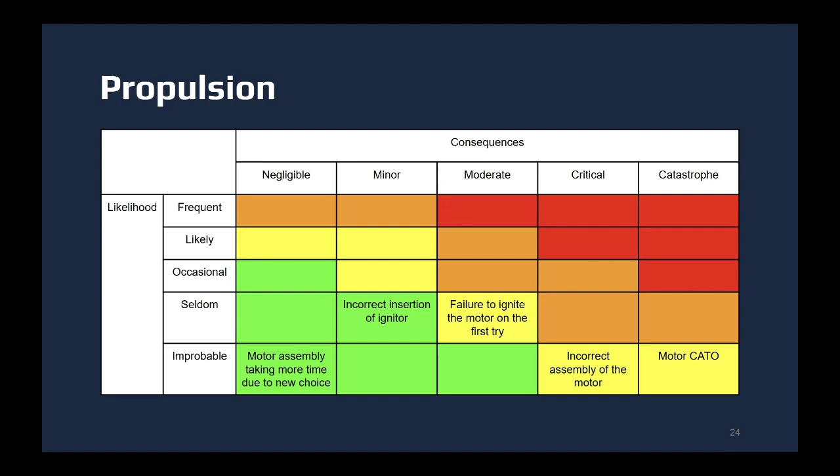And that's us, so that's propulsion.

I'm Matthew, the structures lead for Space City Rocketry. Moving forward in terms of the structures, the goals we have - there was a lot of change in terms of the scope of the project. We're working at a different scale. It's going to be a smaller rocket, still 4-inch diameter, but we're working in a different scope now.

So in terms of the goals we had, it was a lot of refurbishing and also integrating some components we're reusing into the new airframe. For example, for the recovery, we're going to be replacing the U-bolt, and then we need to prep the new U-bolt so it needs to be threaded all the way up. Drilling holes in the airframe, prepping that to integrate with everything else.

Screw calculations we've already done - the most important screw calculations on certain items that are going to experience the most load - but that needs to be furthered for every single component that we're going to be doing, to reassure ourselves that that's going to be integrated correctly and all work out. Refurbishing couplers and nose cone - there's a couple things that need to be done with that, but that shouldn't take too much issue. That'll probably be some of the things we'll do first.

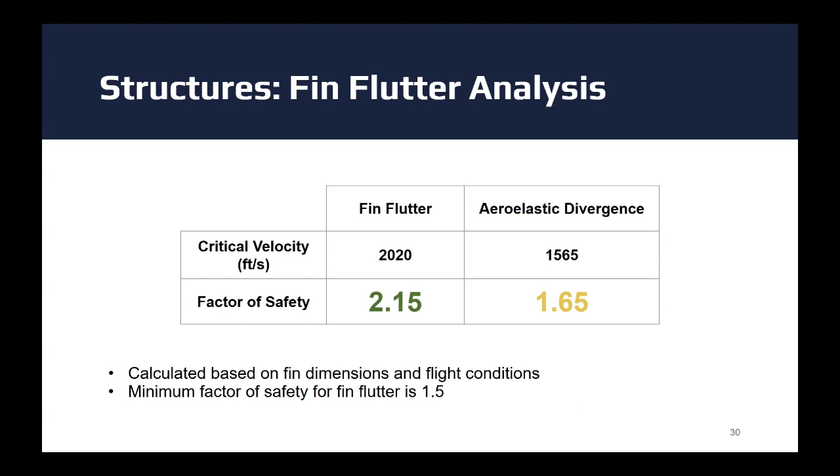As for the reuse of components, it definitely drives down the cost of repurchasing components while allowing us to focus on what needs to be done, essentially the manufacturing of the things that are going to change. I guess it's: what's not broken, don't fix it.

Especially with our change of timeline and accelerated schedule, we want to focus on doing the things that we're going to do right, which is refurbishing and manufacturing new components this semester. So in terms of the nose cone, there's no visible delamination or fragmentation of the fiberglass composite structure.

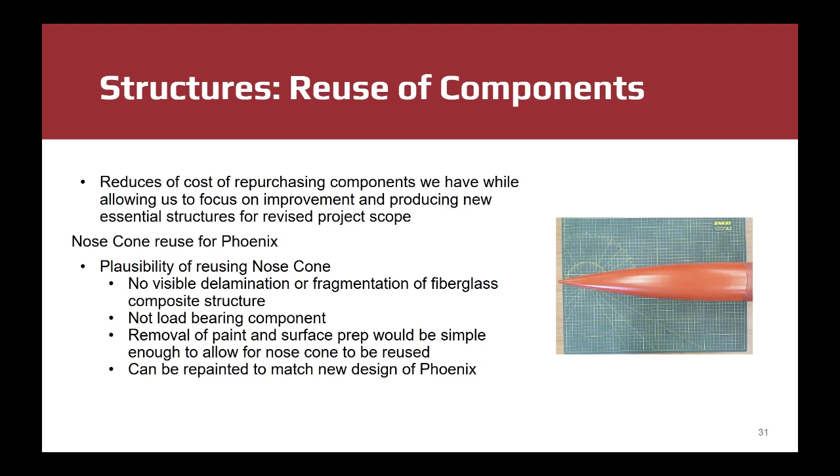Whenever researching the viability of fiberglass composite components, a lot of the methods were just visual inspection - checking for delamination, fragmenting, cracking, or anything of the composite structure itself. That's what we looked at, as well as the fact that the nose cone doesn't take too much load besides making it more aerodynamic. For refurbishing, we'll be resurfacing and repainting it to prepare it for the new rocket.

As for the couplers and bulkheads, we visually inspected the bulkheads. There is one of the bulkheads for the lower avionics that we are going to be remanufacturing because not all the holes line up properly - just an error of manufacturing in general. So we'll be remaking that to accommodate for the coupler itself.

The axis of the screws that the forces are going to be placed upon doesn't actually affect that area it's at. We will need to reattach the rails to the coupler itself, but that's as simple as re-epoxying and lining them up properly.

In terms of the screw calculations, the main ones we've done so far are the payload bay and the motor retainer, because those are the heaviest components, and during the snatch force and in case of impact under drogue, those will be experiencing the highest forces on their actual screws.

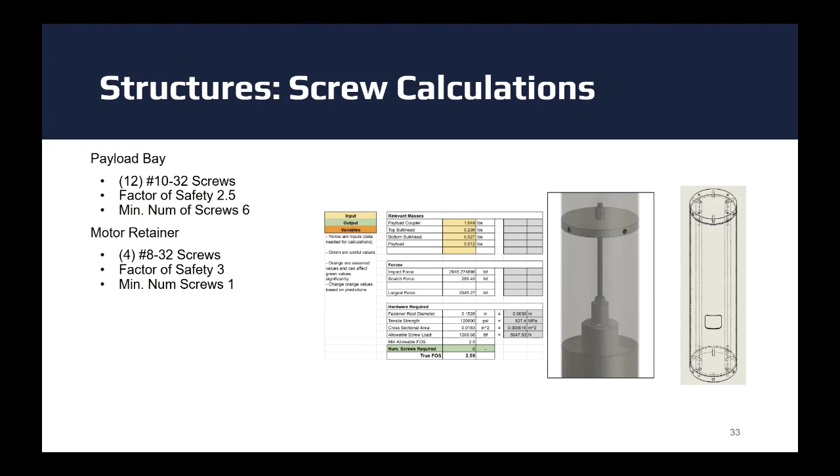In terms of the motor retainer, the minimum screws was one, but obviously we can't just put one screw. So with it being four screws, we're well within the factor of safety for that structure as well.

In terms of risk, it's a lot of the same that we discussed previously. Obviously we are doing it at a different scope, so we don't have the worry of the larger motor and the higher impulse. So it's actually a lot safer in terms of the structure of the rocket.

In terms of fin flutter, it's minimal. We did all the calculations with the new fin structure and everything like that, and we determined that it's all safe and sound by the analysis.

In terms of motor retention, we improved upon the retention method a lot. We thought about it a lot, and with the effective torquing and the locking washers, we don't anticipate any issue with the nuts themselves walking off.

In terms of fastener failure, that was another thing we also looked at. Going back to the actual screw analysis, that's where we made sure the fasteners themselves were up to spec in terms of the forces being experienced by the structure, and we were well within our safety factor on that as well.

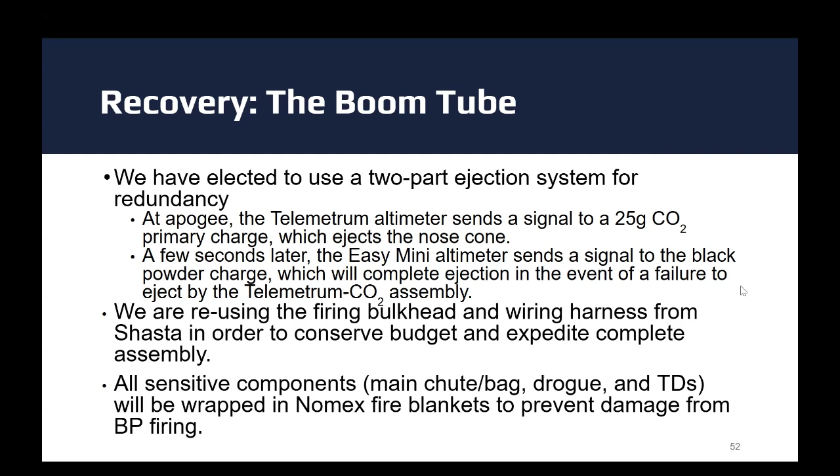So right now, we've chosen to purchase new parachutes for the Phoenix. This is mainly due to Shasta's drogue and main not being suitable for our new recovery bay, which, like John mentioned, reduced in size. Also, Shasta's drogue and main would slow down our descent rate too much because our rocket decreased in size and weight.

So we base our required descent rates from the given descent rates from IREC, and we use RockSim as our intended descent rate calculator, but we also cross-reference with other calculators, which I'll mention in our upcoming slides. We calculate different descent rates for our different parachutes, diameters, and drag coefficients.

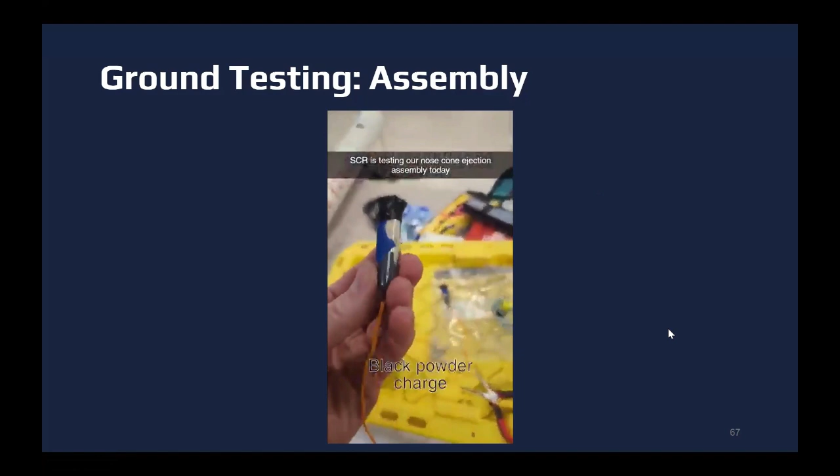This here is a black powder charge packed into a tube with some wadding. This is the smaller Raptor assembly. And then, as you can see here, is the full assembly with the full-sized Raptor and the black powder detonation tube.

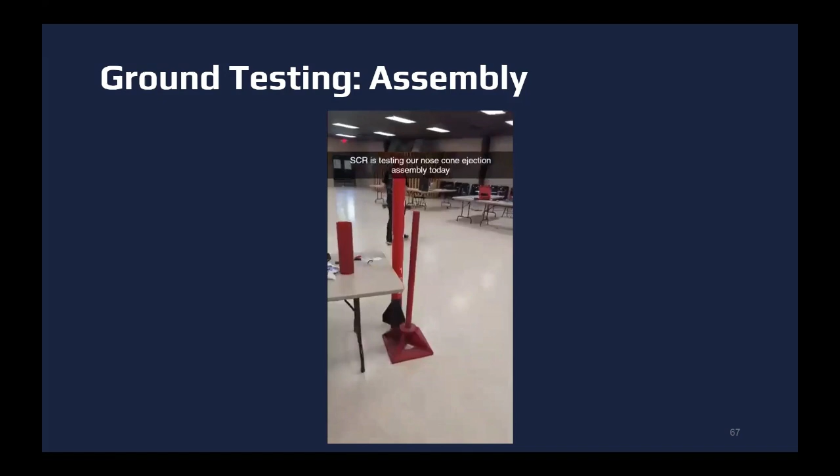Here's a video of the actual black powder system. Or sorry, this is CO2?

We had a couple of failures early on, so I was very excited it worked. So yeah, sorry, I mixed up my headlines. That was CO2, this is black powder.

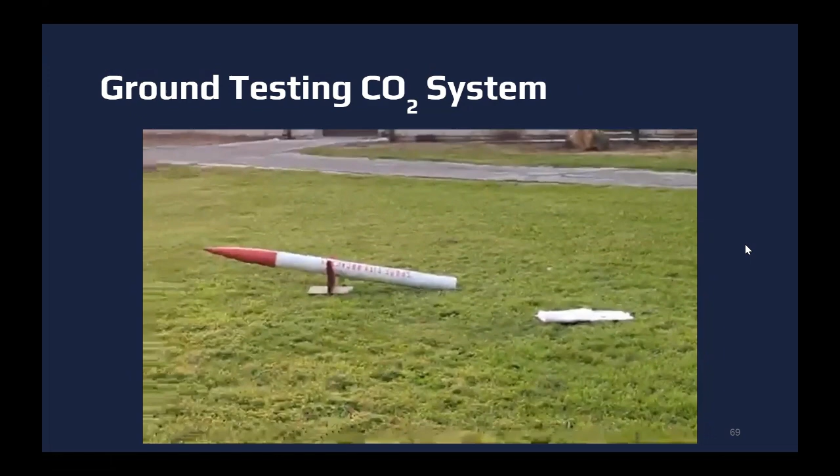A little overtuned. However, because we did secure the nose cone with the Kevlar retention strap and made sure that we were in a nice open field, nothing was damaged - we didn't shoot the nose cone into the side of somebody's house or anything like that. So everything went as expected.

We have also conducted some battery drain tests. So on March 19th, we completed a set of battery drain tests using 4 lithium polymer batteries rated at 3.7 volts. These were the old batteries, not like the new batteries they just got.

So by setting our initial value to our max voltage battery, so here it was just the Y-intercept, we set that to an ideal 4.2 volts, assuming the batteries were fully charged, and then we calculated essentially how long it would take for each one to reach a minimum voltage of around 3.2 volts.

This is not ideal - ideally it would be 3 volts, but again, we can't always have what we want. It's 3.2 because putting it down to 3 would just be ludicrous.

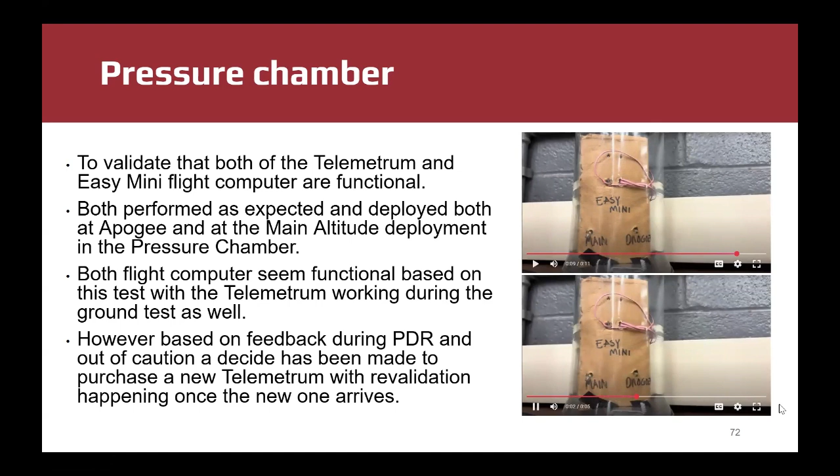To show you kind of the Easy Mini deployments - so the drogue goes off, and this one should be the main. So, and then don't do that.

There we go. So Jake said we tested both COTS flight computers in the pressure chamber, and here you can kind of see the live data we recorded off it. Basically it graphs the height, simulated height, the speed, acceleration over time.

Yeah, there's not much else to add about that. Thank you.

Hi, so for payload, our goals are to design an experiment to study the effects of low hypergravity on sea urchin sperm, and also to have a structure that's capable of withstanding requirements such as temperature for the experiment.

Some of the major updates we have is our target temperature. Rather than trying to keep the samples at -80 degrees Celsius, we've shifted it to 4 degrees Celsius, which has been very helpful. We've also finalized our sample acquisition, and we have contacted IACUC, the ethics board for animal use, and they said we don't need any certifications for sea urchin testing because they're invertebrates.

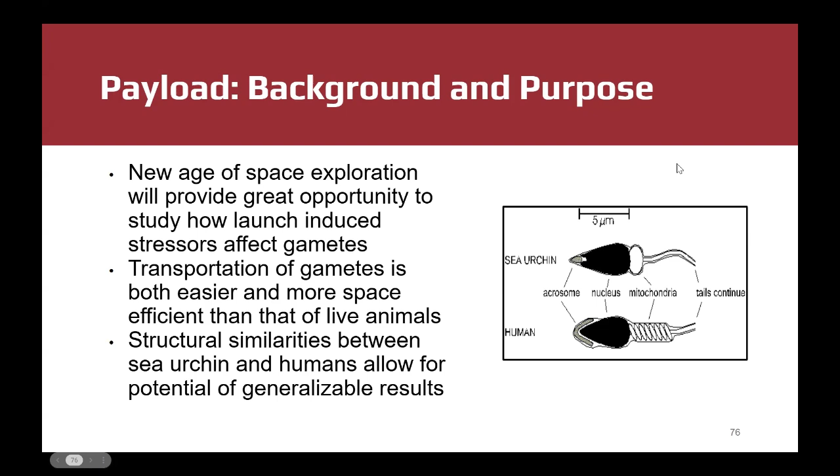A little bit of recap on the background. Since we are moving into a new age of space exploration, we thought it was important to study the effects of stressors surrounding launch on gametes, so we've chosen this avenue of biomedical research aboard the rocket. In the future, they'll most likely use gametes as it'd be more efficient than live animals. We've chosen sea urchin sperm because of the similarities it has to human reproduction, given that they're used as development models for humans.

Our hypothesis for this experiment is that as a result of the low hypergravity associated with launch, we will see an overall decrease in sperm health. This could be through the 3 metrics of sperm health we mentioned at the PDR: a decreased overall count of sperm, more clumping of the sperm, or morphological changes. Also, since we are no longer cryopreserving the sperm, there might be more damage as it would be a fresh sample.

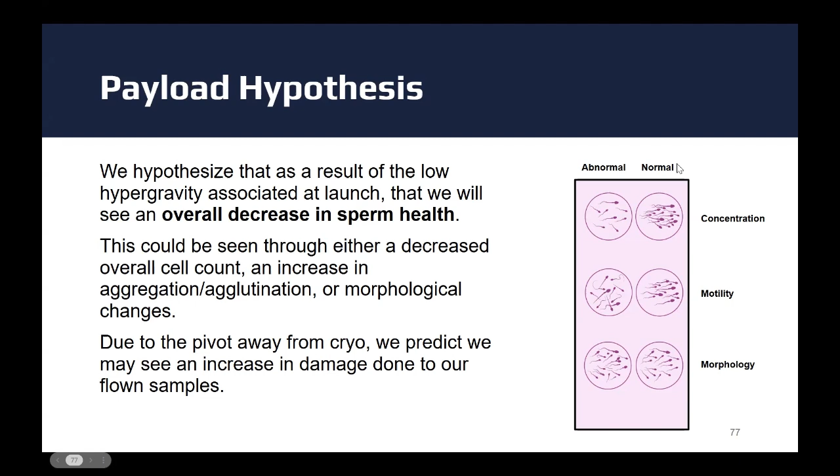So we still plan to use sea urchins. The next slide is our decision matrix regarding that. Looking at the upkeep, accessibility, viability, and ethical concerns, we found that sea urchins would be the best model organism.

We're either going to be using pencil urchin or green sea urchin. We're leaning more towards green sea urchin right now, as that's the one available in the embryology kit we were looking into. The kit we finalized has the urchins and everything we need for sperm extraction and sea urchin survival. Due to us not finding any labs willing to donate sea urchins, we found a kit that has everything we need.

This is the updated protocol. We no longer have the cryo and thawing protocol because we won't be doing that. Our protocol for analyzing sperm health before and after launch is the same, and that's in the appendix. An update to the protocol is how we're harvesting the gametes from the sea urchin.

We will be injecting some potassium chloride into the urchins. We're approximating 14 sea urchins, 7 of which will be male. We're trying to look into requesting more males, of which they're saying 50% would be fertile, so we're expecting 3 or 4 fertile male sea urchins. 1 sea urchin is all we need per trial, and it will produce around 3 to 4 milliliters of sperm.

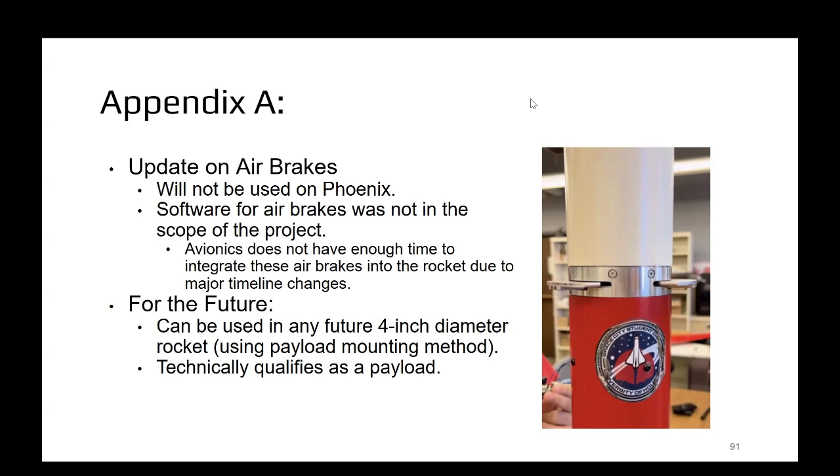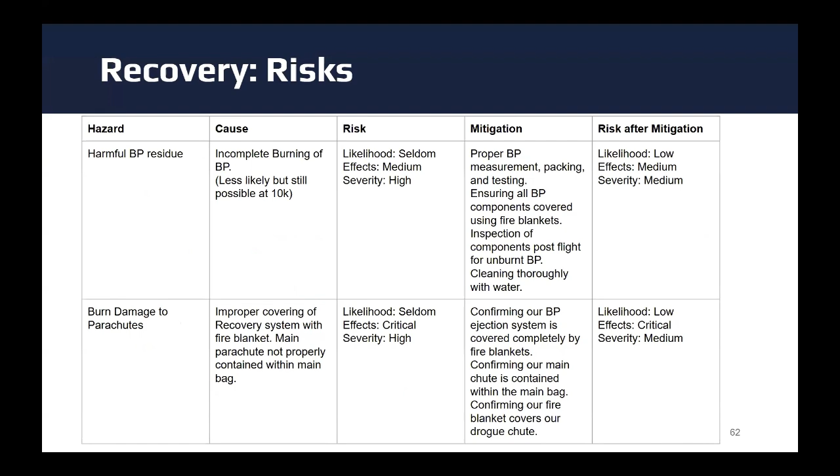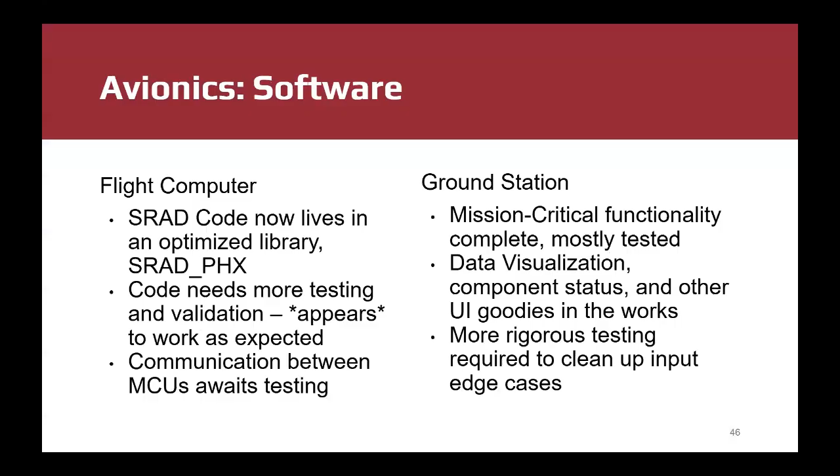The reason we have a minimum and an ideal is basically what you're saying. The minimum of what we consider mission critical would be first the chief engineer and project manager, because a lot of the protocols require the lead and alternate lead of the team to be there. In addition, we would need at least one recovery sub-team lead, at least one avionics lead that is ham certified, and we would also need our structures lead there. For the payload to function as designed and for them to do the testing in place, they need 2 people. So the payload team would make the total 7 - that is our absolute minimum requirement.

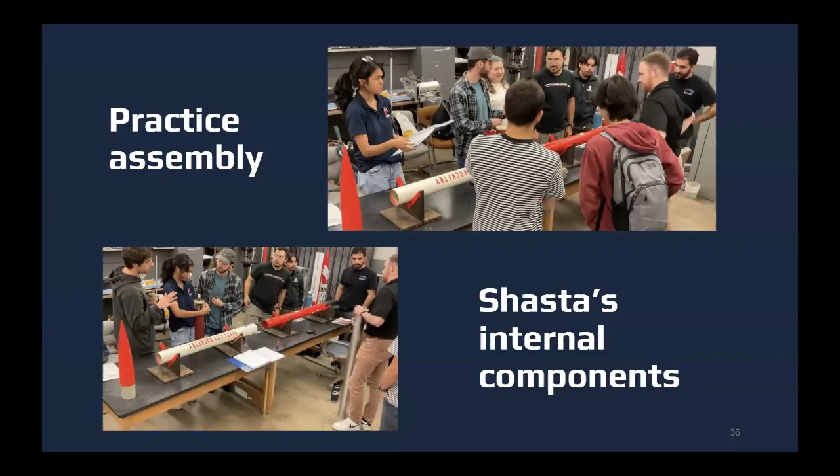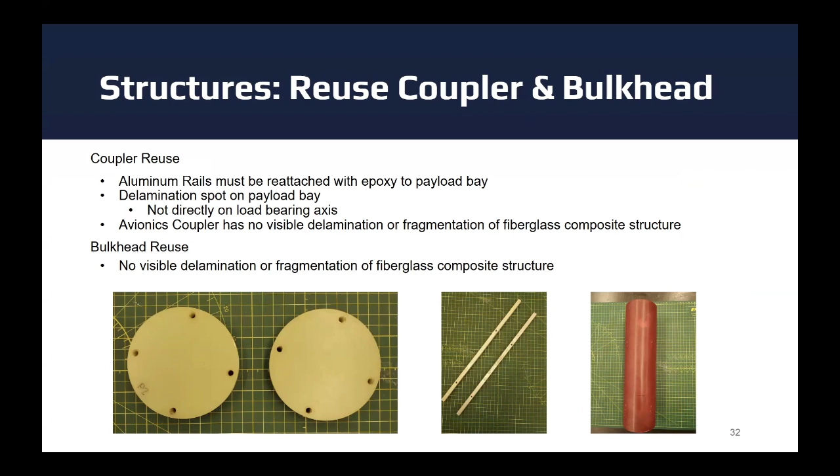It would mean that we don't have a propulsion lead there. However, Chief Engineer Alfredo was previously the propulsion lead, so it would mostly be on him to deal with that, and Matthew as well, our structures lead, to deal with motor retention. Obviously 7 people is still very tight - it's pretty much the entire recovery team. The recovery team is about 5 people, the people that can actually go and physically get the rocket back.

So that minimum for the logistics would mean 7 people go, and also the reason the Rocketeer fees is 0 is because it would mean we are paying for our own Rocketeer fees, which is $75 per person. In the ideal case, we would not have to pay our own Rocketeer fees, and that would include 15 people. So we do currently have 15 leads in the team, not all of whom would go, mostly because of availability.

But we would also like to include at least 3 non-SCL members, more so new members, maybe sophomores who are going to have a better chance at carrying the team for next year and will have competition experience that's really beneficial to the team. Because right now, the only person on the current team who has been to competition is Matthew, our structures lead, and that's been a bit of a limitation. So we would - oh, I'm sorry. Yes.

Okay, we do have 2 people. I'm sorry about that. Yes.

So we have 2 people on the team really that have been to competition, although Matthew did not even go with UH, so let's say one. We would definitely want to set the team up for success for future generations by sending people that are not just mission critical, but so that they can have the experience and carry the team as well. So that is on the higher end, that would be 15 people. That's all the changes in the cost for housing, transportation, food, and the Rocketeer fees. That's where those come from.

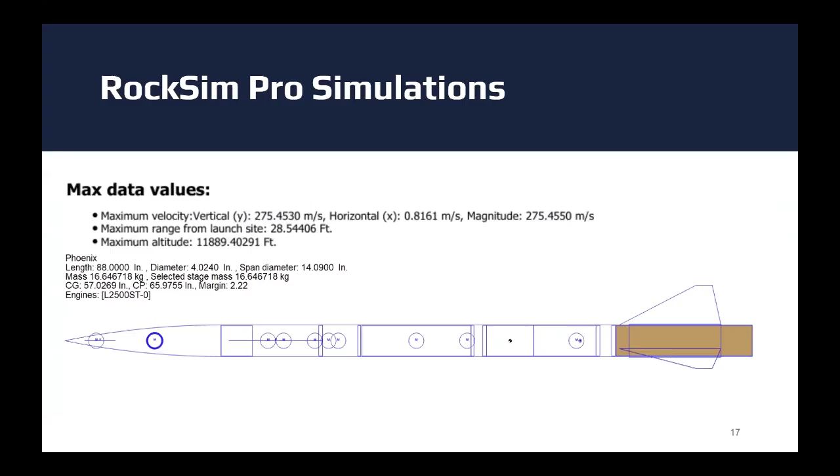We've been looking into some forums, and the consensus about 2 months ago was that currently in RockSim, you shouldn't put wind data into the rock.

Oh sorry, you're quiet right now. I can see you speaking, but you're just quiet.

Yes, we were specifically requested by IREC not to include wind data into our simulations, at least for the purpose of our progress reports. But we do have the wind data, and it is in the simulation. I'm the one doing a lot of the flight sims, with RockSim Pro. So I've been asking Randy for a lot of help with that, and he's pointed me to resources to get wind data.

What about temperature? The current simulation was run at 95 degrees Fahrenheit, just looking at data provided by Ezra. Okay cool, thank you.

I had other questions too, but for the overall team - how many tests are remaining overall? Recovery, avionics, payload on the biological side - two, on the structure side I can think of three right now. It is a lot of testing.

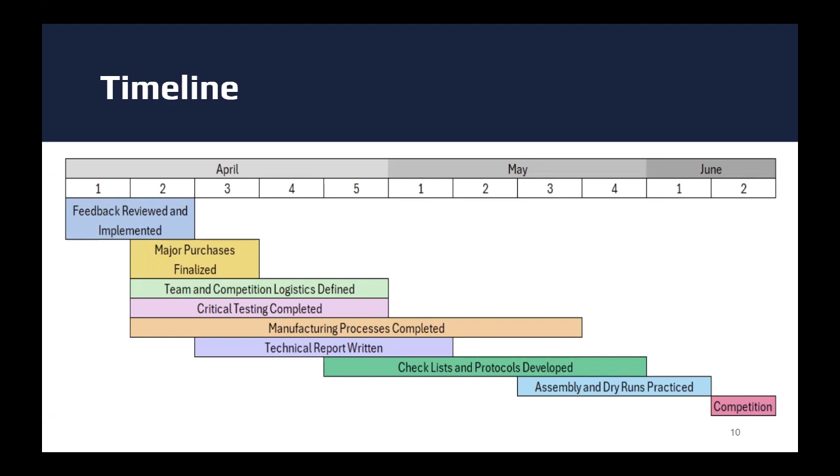Switching down to the 10K COTS category, the motor issue is almost entirely eliminated. We picked a motor that was already in stock, so timing is going to be less of a problem. We also scaled down on some of the SRAD projects, at least the ones that were going to be most critical - for example, not implementing the air brakes anymore. And really just making sure the rocket has a lot more manufacturing processes that are simple and not as time consuming.

I'd say those are the biggest changes that have been made. It's basically a whole new rocket. While we're still reusing some of the internal components, the scope has changed dramatically to something much more manageable within the time frame and experience that the team has.

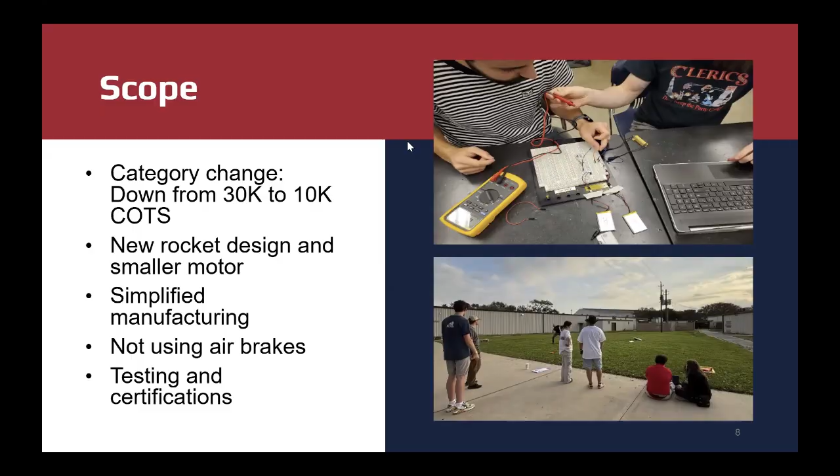Nobody wants to see the recovery.

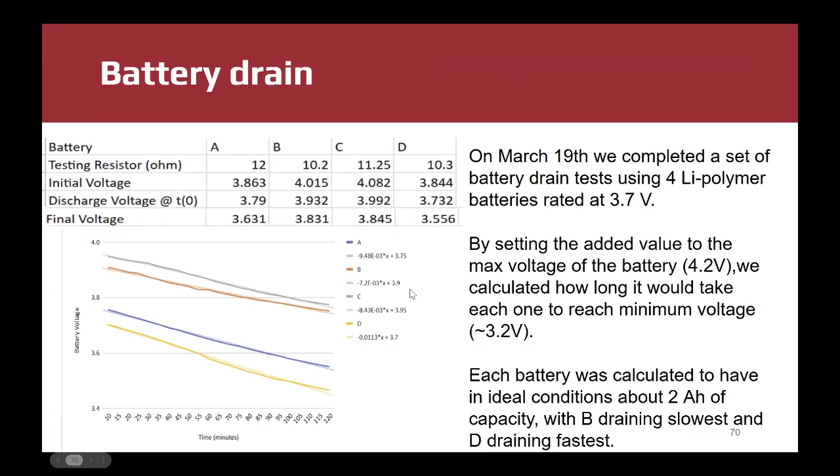Sure, I have plenty of questions, but I didn't want to - I want to talk to them.

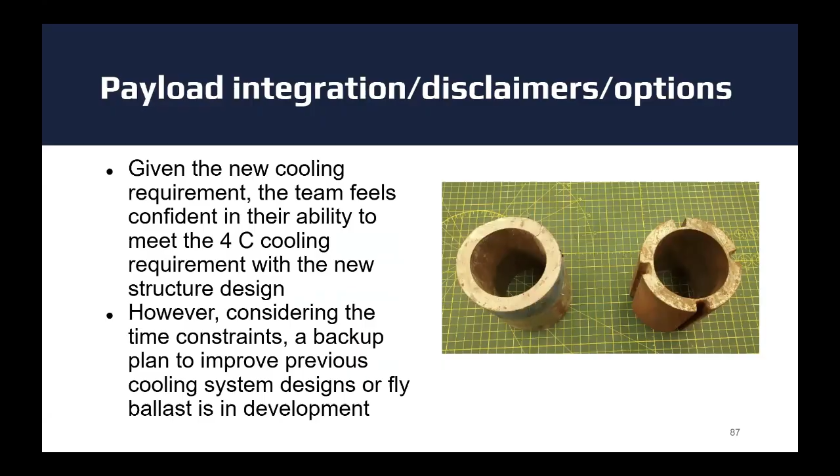You're a really good project manager. You answer things very politically.

How much - I have a question about mass. I feel like it's a thing that'll make or break the rocket in terms of the motor you guys are using. And it was only one team that talked about the mass budget they had, and I think I wrote that payload had 5 pounds, and nobody else said anything about it really.